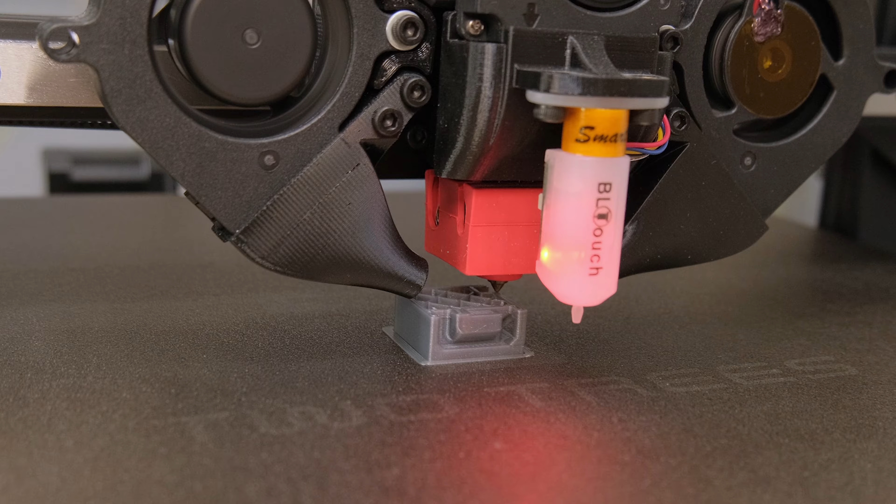Once in a while I see a comment saying that bed slingers are dead, no explanation why, basically just trust me bro. So is there any truth to it? Is the Core XY design the future of even the cost-effective printers?

Well, to determine that, it is actually not that hard. We just need to compare how much it costs to make one, look at the main differences and see some print comparisons. So without further ado, let's get an answer based on some actual data right after this quick sponsor segment.

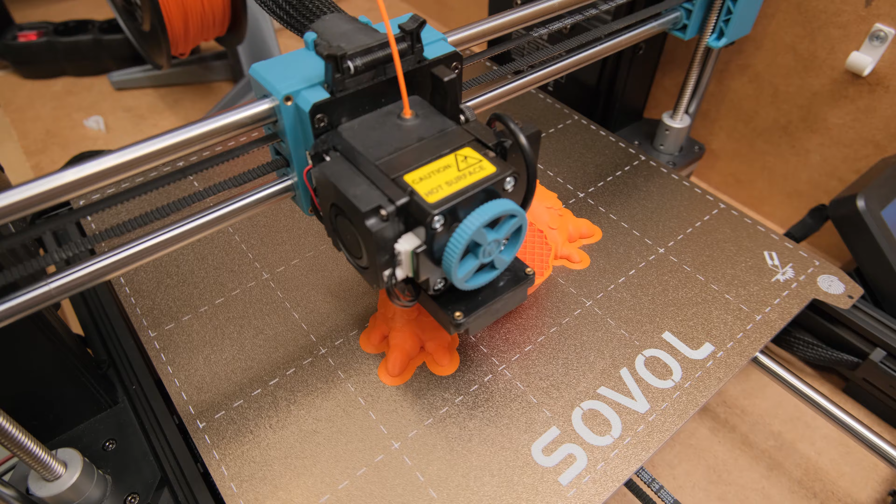Bed slingers, that is what most people call the printers nowadays, where the whole bed moves along the Y-axis. Meanwhile, in Core XY design we have a stationary bed and all the X and Y movement is performed by the printhead. This leads to bed slingers not being able to accelerate as fast because we have to move the heavy bed.

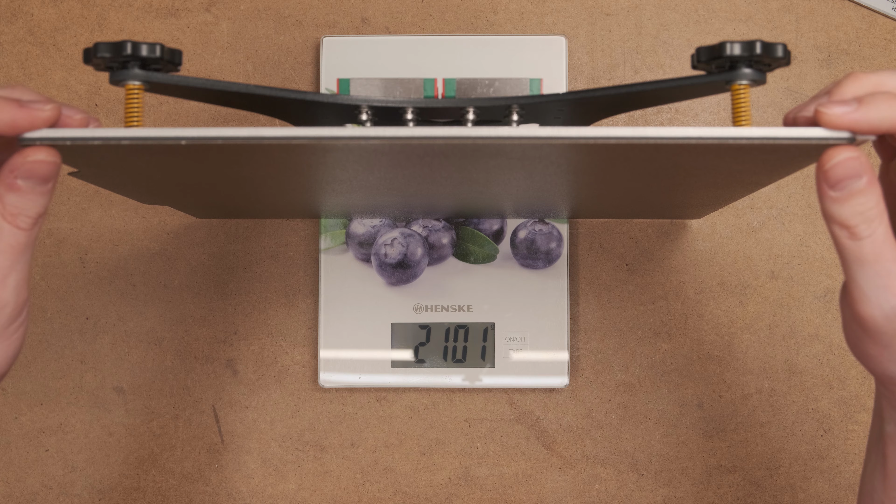My test subject for the comparisons will be the SV06 Plus running Klipper on a new BTT Pi that company sent for a video. It will represent a cost-effective printer that has a good motion system with no firmware limitations, but also better show what can go wrong with bed slinger designs because of its size. And with bigger size comes bigger problems.

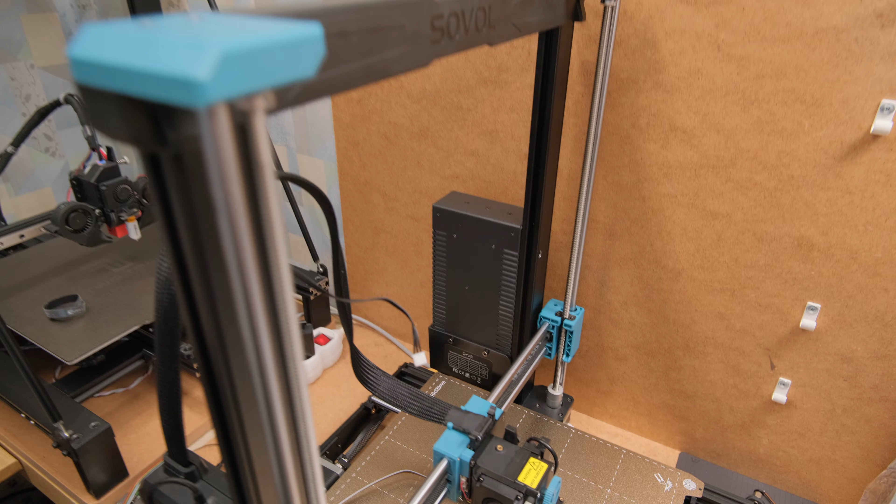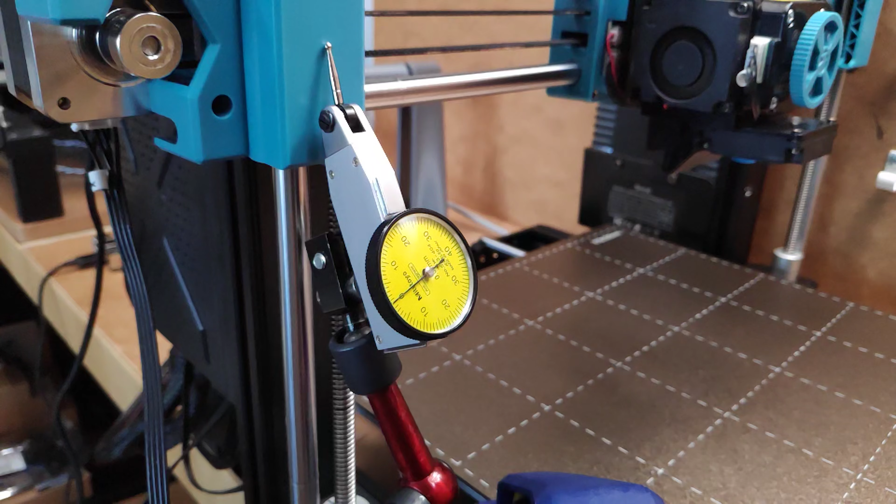Accelerations on the X-axis almost never will be an issue because of how light it is. But vibrations from the heatbed at high accels could be transferred to it along the Y direction if your frame is not rigid enough. That is why ideally you need to use supporting rods that eliminate this issue.

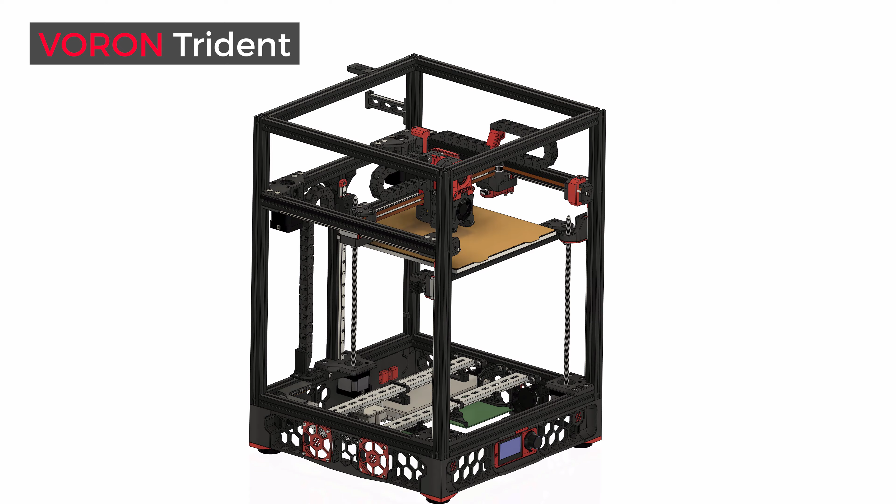But that obviously adds up in price. So first let's roughly calculate how much all the needed profiles would cost for a bed slinger compared to Core XY. I'll be using a Voron Trident with the same size bed for reference, and I have to say I thought the price would be a little bit closer, but even the unoptimized design where profiles I use as supporting rods gives us a 37% cost difference compared to the Core XYs.

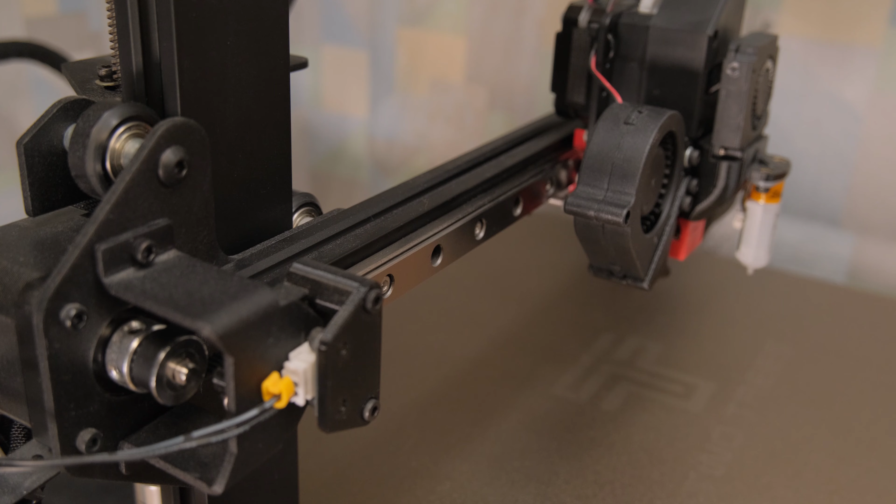This example is when using linear rails, and there are different ways to go about it, as Sovol does here by using linear rods. But the reason I love linear rails so much is together with aluminum extrusions they give a way more rigid axis.

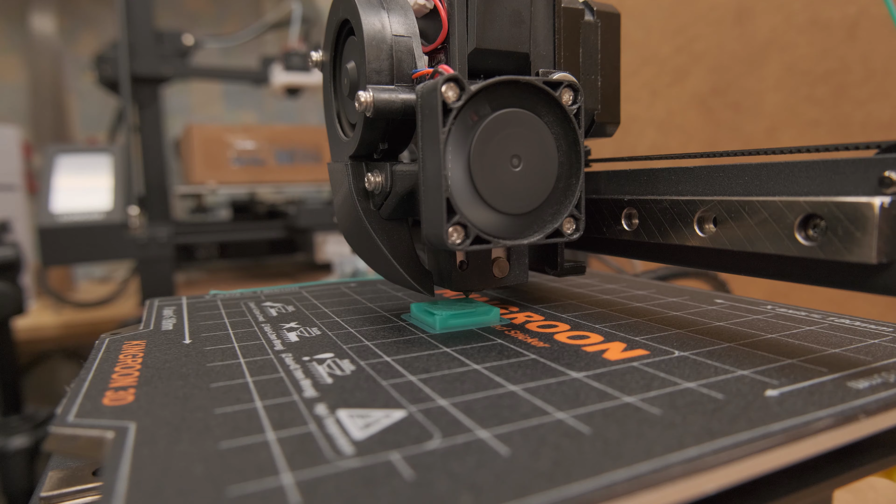In the SV06 Plus case it also doesn't help that those rods are so close to each other, resulting in way more play. And you might say, but that doesn't affect when printing. That is mostly true if you print at low accels and speeds, but the more you push the printer to its limit, the more it could start affecting, as vibrations will be on a different level.

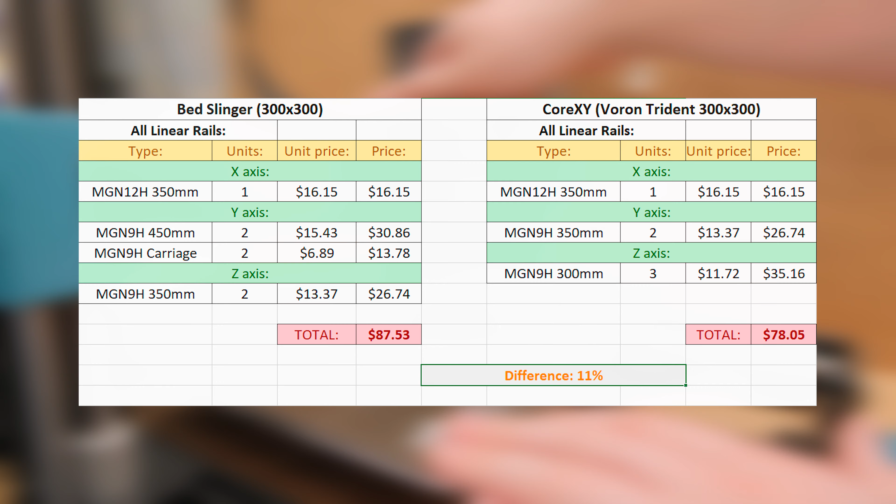That leads us to the cost of the motion systems. Again, for a more apples to apples comparison, I will be using the cost of linear rails. And the price difference in this aspect is surprising. Core XY design here is cheaper mostly because we will need longer rails and additional carriages for the bed slingers. We also have to space them further away for better stability.

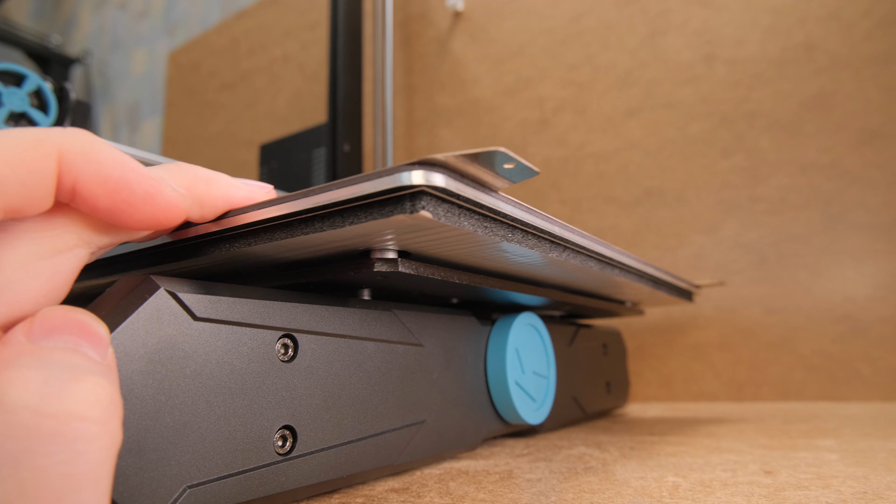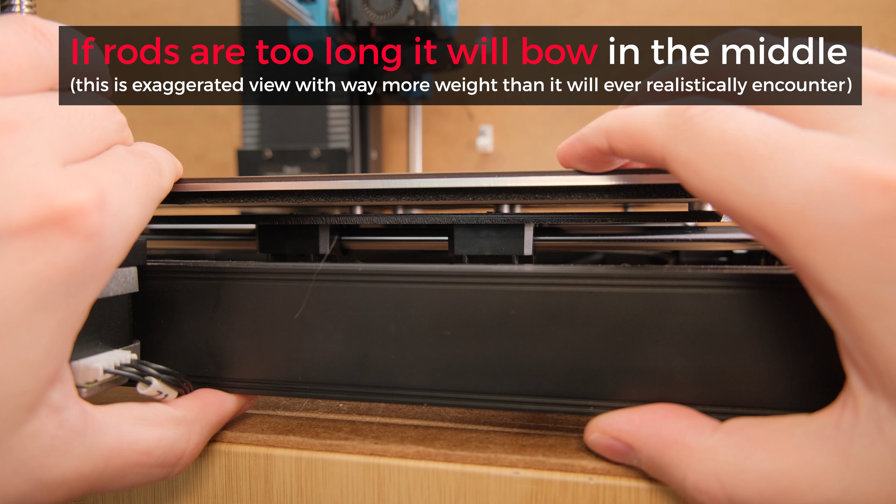And because we have a bed leveling probe, we can use metal spacers further away to increase the overall rigidity of the assembly. But like before, linear rails on aluminum extrusions will be so much stiffer, and the rigidity limiting factor will be the bed's mounting plate. Not really an issue with rails, but with linear rods it can be if you go too big, as you can get a slightly bowed motion.

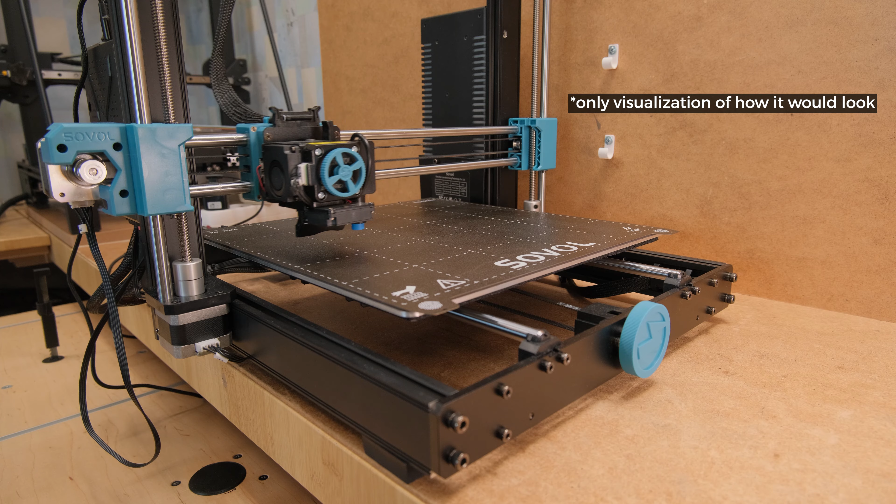Moving further away from the bed, we can take a look and compare the Z-axis. Two motors here are great, but because they run on a single driver, there is no smart way of leveling the gantry by probing at each side of the bed. It just rams both ends of the axis into the top and aligns the gantry in this way.

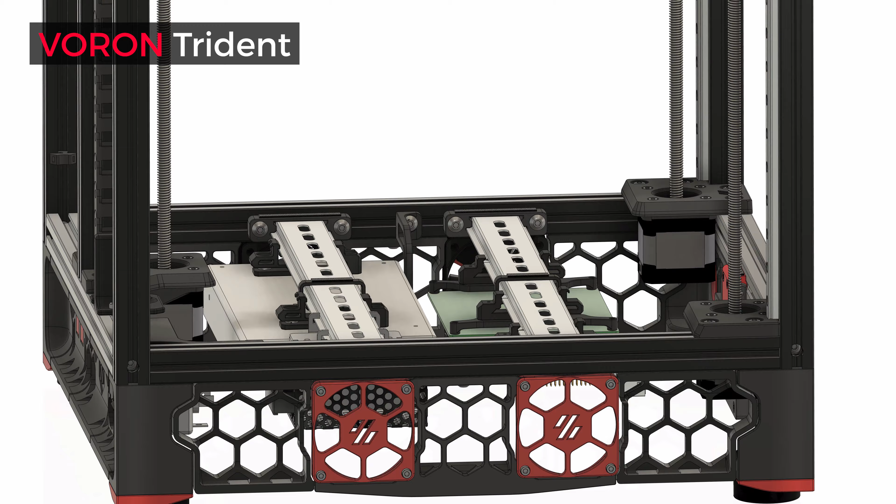Meanwhile, Trident has 3 motors that are controlled by separate drivers. That increases cost quite a bit, but a more budget-oriented Core XY mostly uses 2 lead screws that are synchronized with a belt and have a single Z motor.

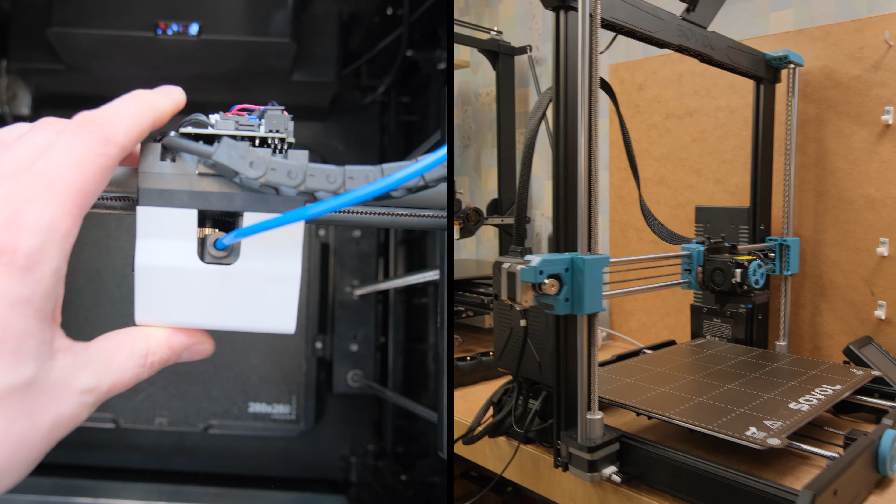So I would say that in this aspect the cost between the bed slingers and Core XYs can be basically identical, and I don't see anything that could weigh the cost significantly in one direction or another between the two designs. Well, apart from that, we'll need around twice longer belts, more pulleys and a lot of bearings for the Core XY, so the price will be more than double here.

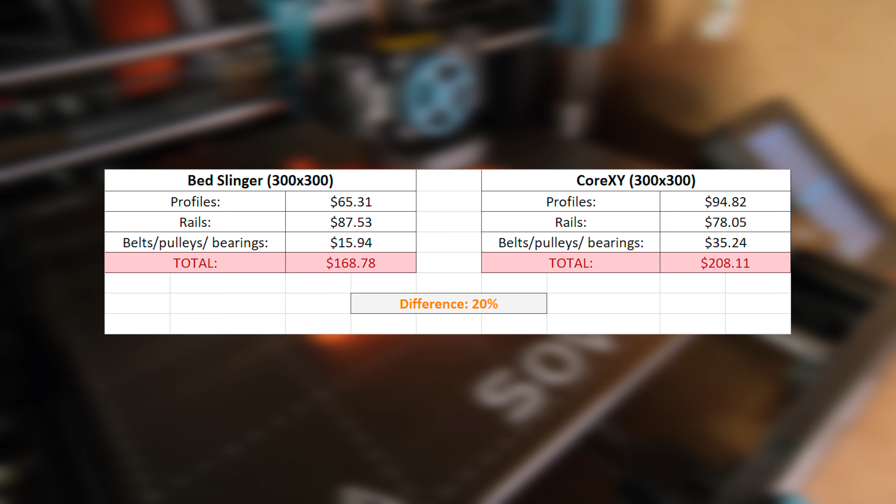That leaves us with a roughly 20% difference cost-wise between the designs on these parts. But we should be comparing the cost of all the parts, as that gives a way better representation, which is only 10%. So does this mean that the bed slingers are actually dead? There's only one way to find out, by comparing them with a Core XY machine.

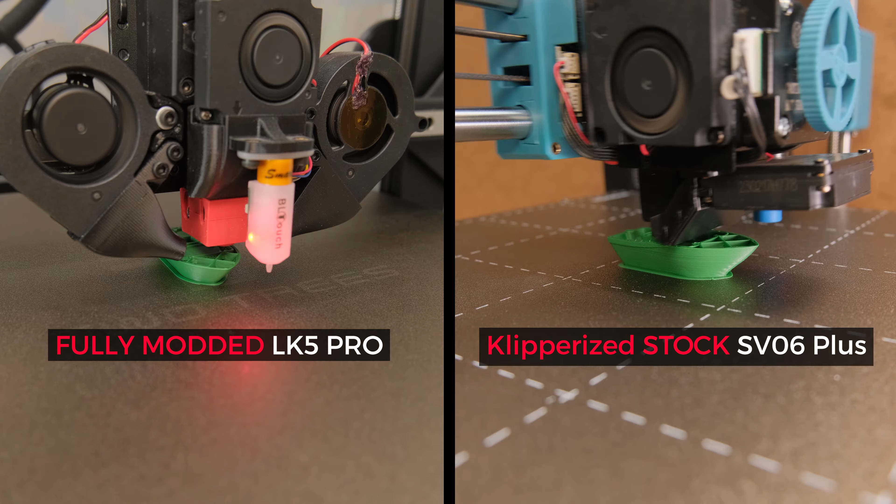And these are the Benchy print results. Try to guess which one was printed on the SV06 Plus, my fully modded bed slinger, and a Core XY machine. All of them used recommended input shaping settings, and G-codes were identical except the Z-hop speeds and the retraction settings.

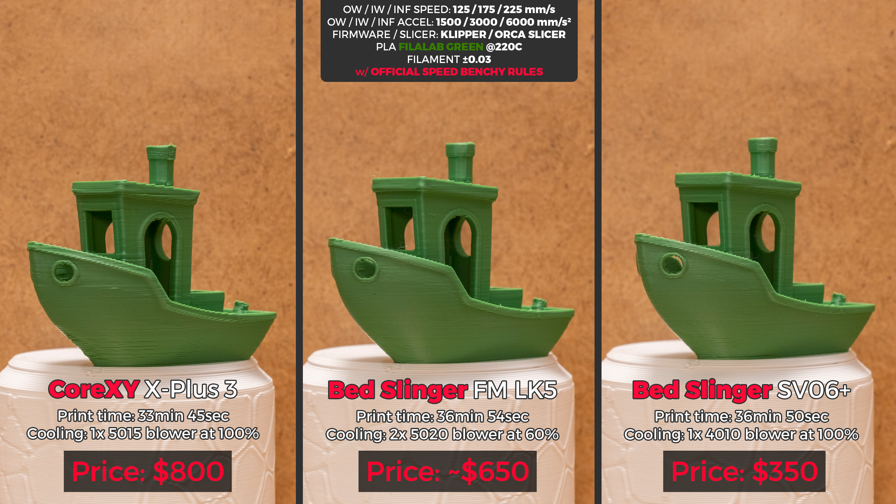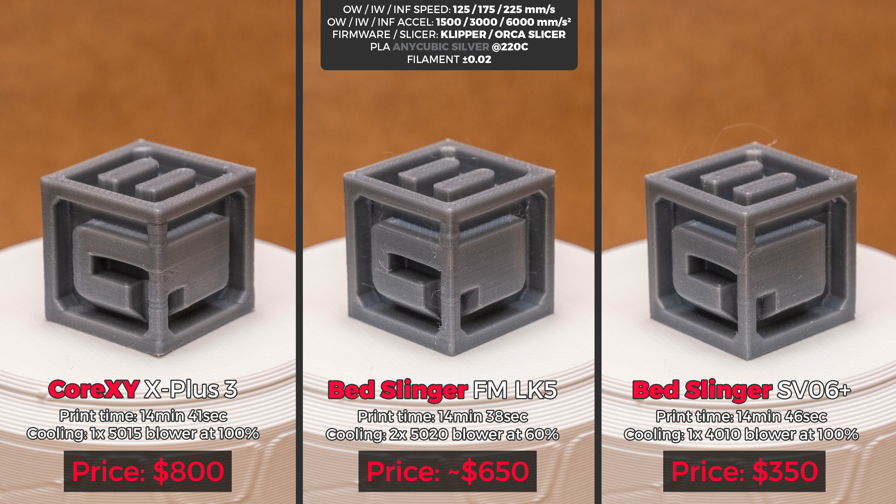So here is the answer, and those are probably unexpected results. So what about higher accels of 6K? Well, it was more or less the same, and there was an identical story using the other filament with my test cube print. Surprisingly, SV06 Plus at these lower accels printed even better than my fully modded LK5, but with high accels it falls off as it just didn't have enough cooling.

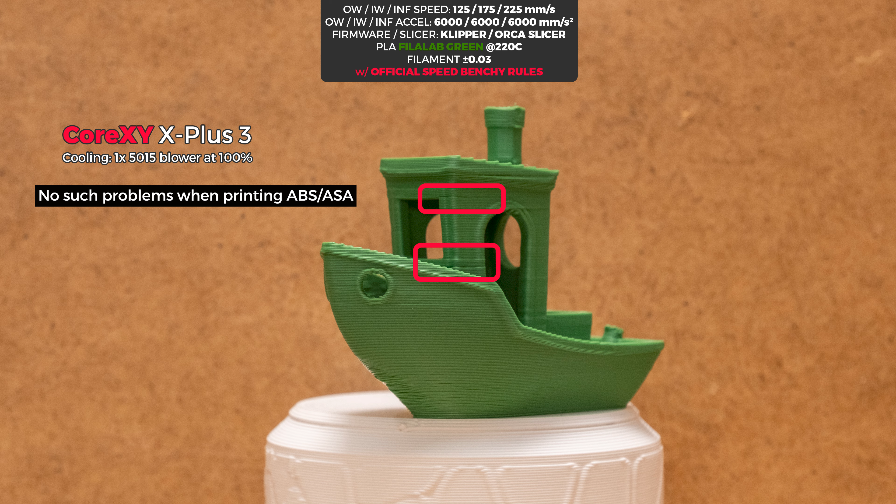But can this be true? Core XY is superior, how can this happen? Well, these most likely are the extrusion problems because of hot end heat creep and not enough part cooling.

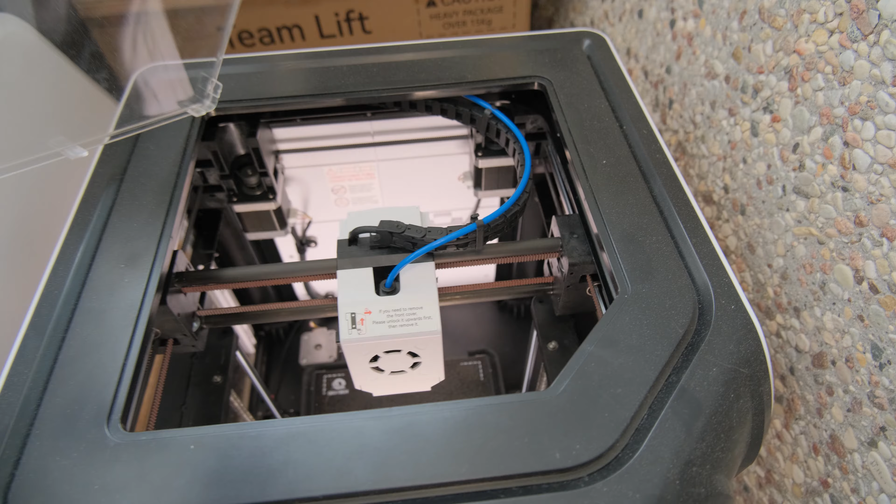Have you ever wondered why companies add those huge blowers on the side of the printers? Because a lot of Core XYs are enclosed and the only openings for cold air will be at the front and at the top when printing PLA. Meanwhile, bed slingers are fully open and even the moving bed helps to get rid of heat faster.

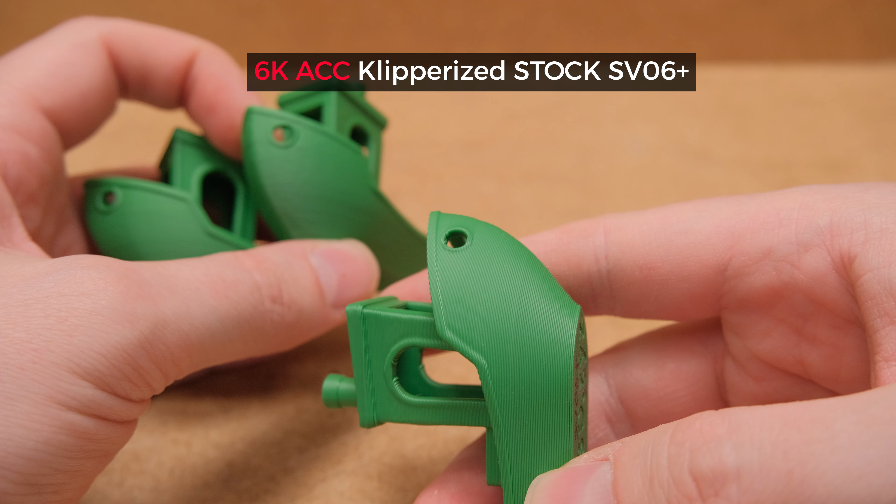But even when I checked for ghosting artifacts, they were basically identical on all the prints. The only difference here was that I was able to push up to 20K accels on the Core XY printer, which gave a 20% print time reduction. And we can't print at faster speeds because most hot ends are the bottleneck.

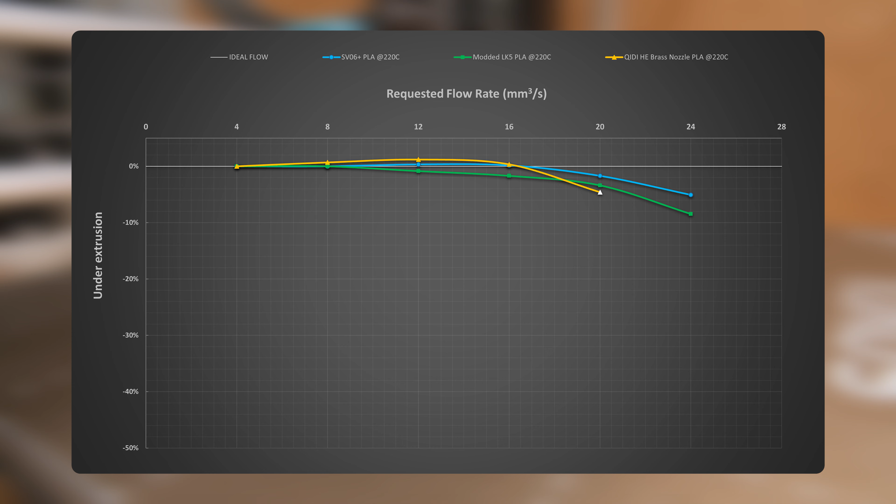Fun enough, from all these printers, the cheapest one had the most consistent extrusion and the best flow rate. So no wonder the print looked best on the Klipperized SV06 Plus when it ran at reasonable accels. All I'm trying to say here is that the printer type alone doesn't paint a full picture, as all printers can be designed poorly.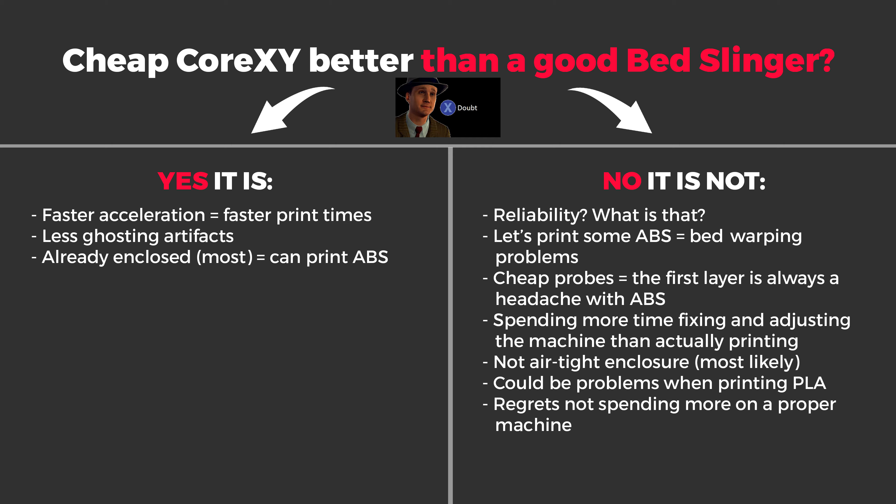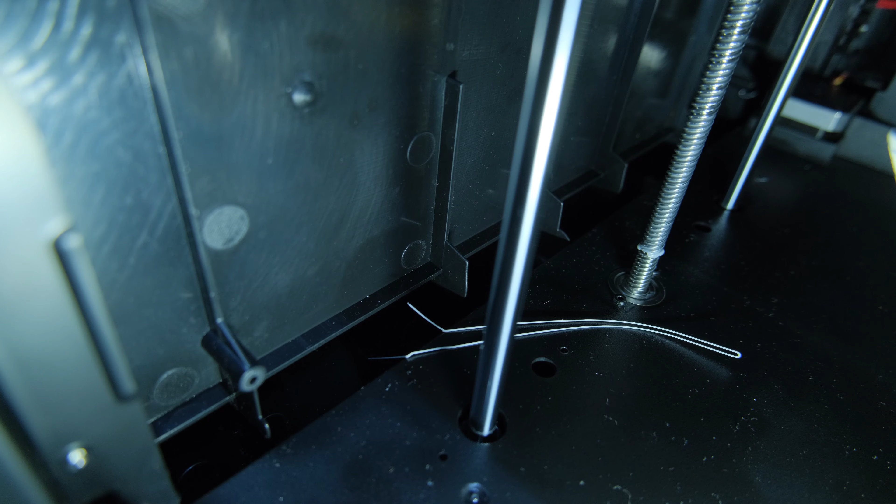Core XYs will always be superior acceleration-wise, but smaller bed slingers are still very capable when running Klipper. Also, bed slingers will always be superior cooling-wise when printing PLA, and enclosed Core XYs will always be superior when printing ABS. And to make a printer that can do it all requires knowledge, resources, and most importantly, more money.

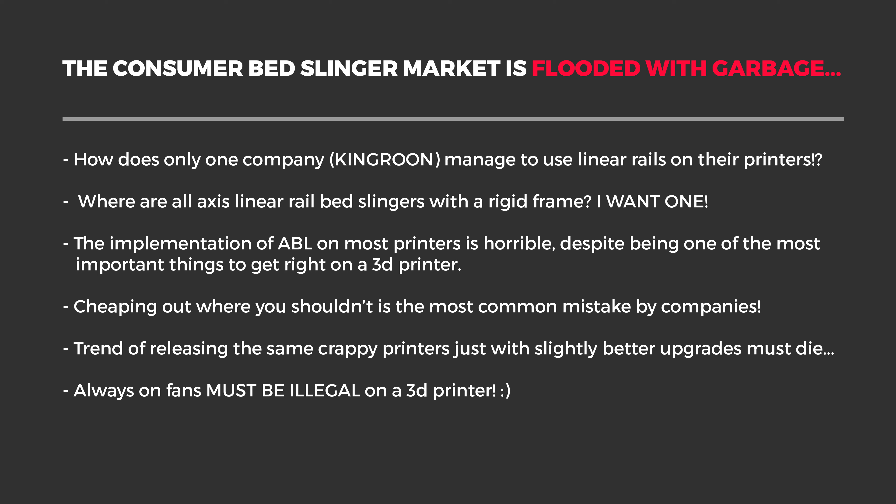And because most companies to this day can't even make what I would consider a good cost-effective bed slinger, in my opinion, cost-effective Core XYs sound like a myth. I wanted to say that the SV06 Plus is the exception on the bed slingers front. Well, it still kinda is, but it has a serious flaw.

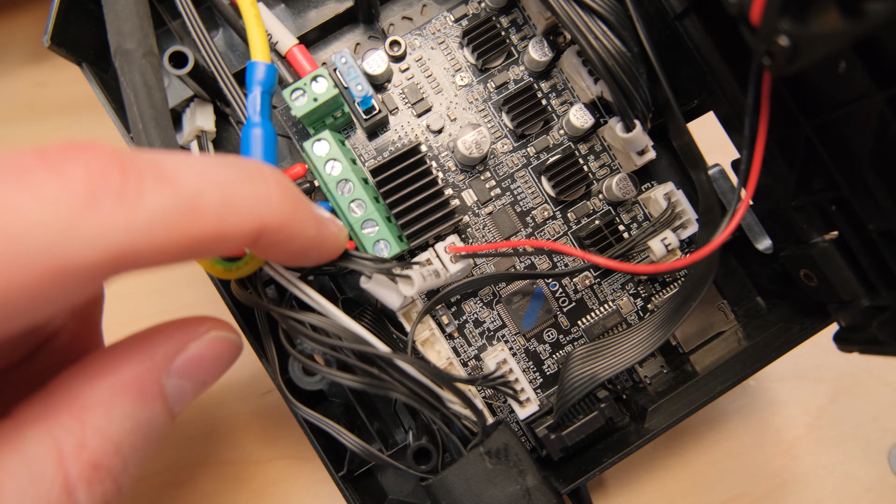The part cooling and the mainboard fan are tied together, meaning that if you print something like PETG without a print cooling fan on, you will fry the board.

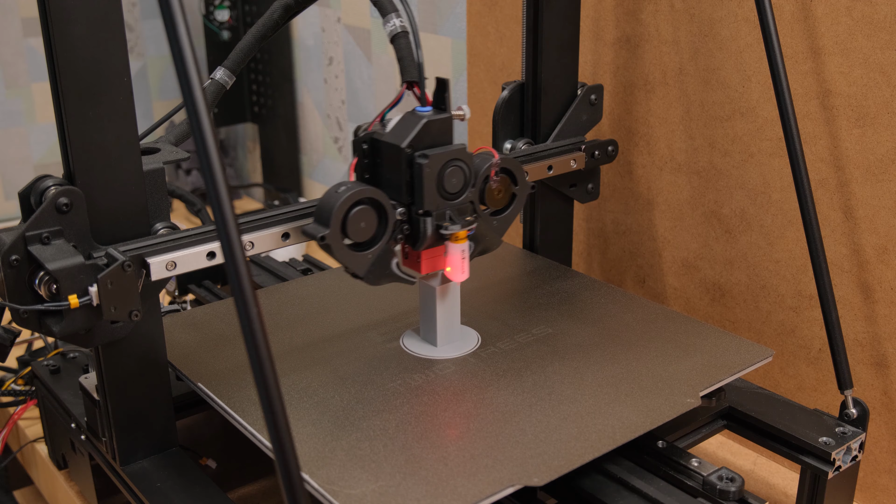But hey, I digress. So unless you are going the more premium and closed-source route with Bambu Lab, or premium and open-source with DIY printers like Vorons and others, I doubt we'll actually see a good cost-effective Core XY anytime soon, if ever. That is why I still don't think bed slingers are dead, especially considering that most folks only print PLA, the maintenance and modifications are way easier, and the smaller ones are still very capable.